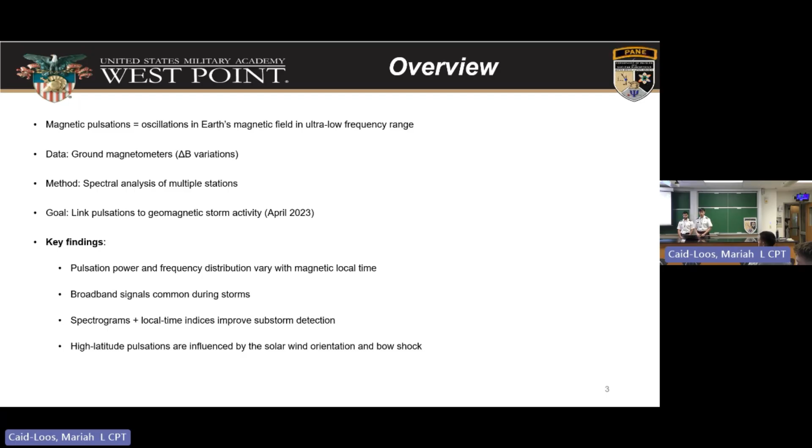So first of all, introduction. What is magnetic pulsation? Like I said earlier, it's the oscillation or shaking of the Earth's field lines in the ultra-low frequency range, and we can see that from the ground. It's very active and complex during a geomagnetic storm, so that's why we're trying to relate the pulsation to what happened in space.

Next slide. So of course, in our profession in the Army, we really care about the so-what. So here's the military relevance of the effects this might have. Here, as you can see, highlighted in yellow are some of the indirect effects on military applications. We can see a lot of these effects are degraded range and accuracy for a lot of our systems. So of course we have to keep that in mind when we fly, and do it accordingly, knowing if there's a certain storm we have to keep this in mind.

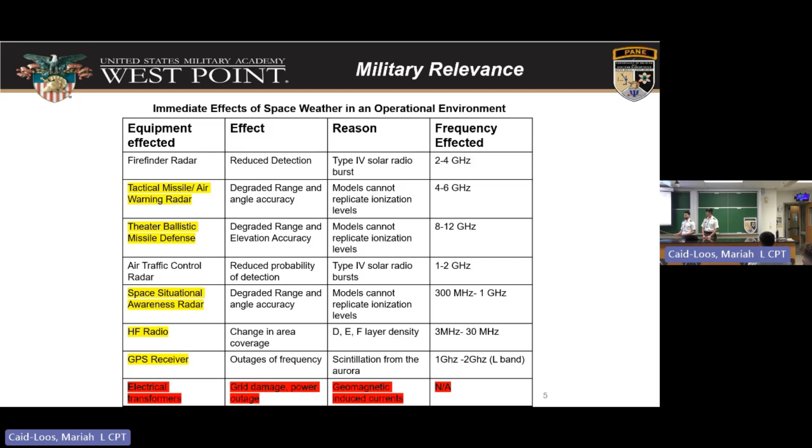And here in red, this is probably the most important thing, the direct effects. For electrical transformers, it causes grid damage and power outages due to geomagnetic induced currents. We can see a case study in Canada where a storm occurred, and the geomagnetic induced currents actually caused a power outage for 6 million people for 9 hours. This shows the scale it might have, like a nationwide scale. You can see how many people were affected, and for the duration, since it's 9 hours, it's not a short period of time.

So yes, some of the factors, but the pulsation basically tells us what happened in this space and what caused those magnetic pulsations. We have different frequency classifications for pulsation from PC1 to PC5, and PI1, PI2. Those are based on the frequency range.

There are several common causes for each classification. For example, PC3 might be caused by the first interaction between the solar eruption and the Earth, and we usually see that in the PC3 frequency range. Whereas PC1 is a little different—there's wave interaction in the radiation belt.

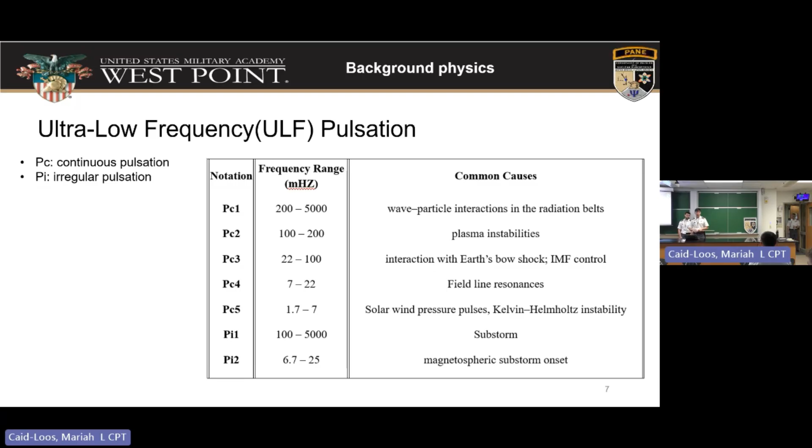So we try to understand what frequency distribution is within that geomagnetic activity, and how the strength of pulsation evolves during the 23-24 April storm.

Moving on to the data and methods. First of all, we use the Wind satellite to tell us how this solar eruption looks—the orientation, the speed, and all that.

Supermag tells us magnetic field perturbation on the ground. So based on that measure, we can link to what happened in space.

Ampere is just an indication for substorm events. A substorm is basically one of the geomagnetic activities that happens at high latitude and on the night side, and usually causes the northern lights. So if you heard about substorm, you can think about northern lights. This is connected.

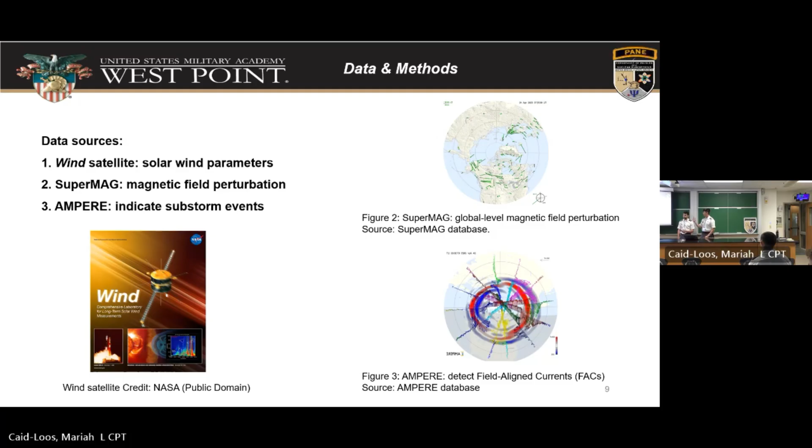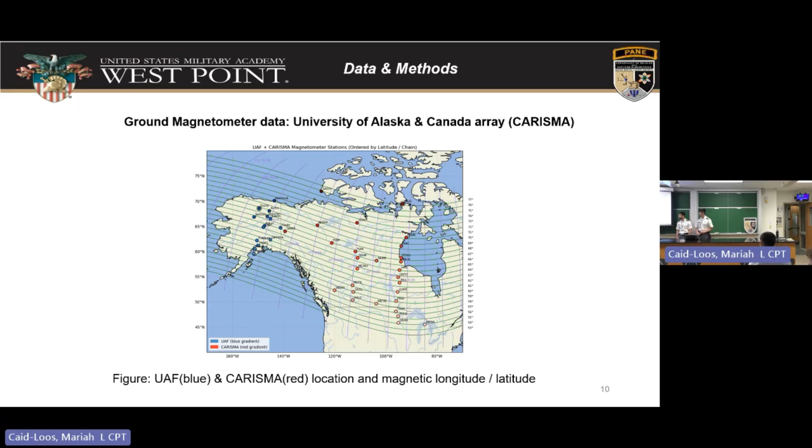This is the ground magnetometer station in Alaska on the left, and Canada on the right. Those 20-ish stations are where the data that we pull out comes from.

We get the raw magnetic field data on the left-hand side, directly pulled from Canada and Alaska. Then we calculated the magnetic field perturbation, and used a bandpass filter based on the frequency classification of pulsation that we talked about earlier.

Then we produce a spectrogram. It tells us about the 2-day event from 23 to 24—the x-axis is time, and the y-axis tells us the frequency range and the strength of the pulsation. Yellow means strong pulsation, whereas dark blue tells us there's a quiet event, nothing happened.

Then we produce a frequency spectrum. We're interested in what happened during this strong pulsation, so we pull it out and see frequency ranges versus the relative power, trying to see where PC3 or another range has a strong response.

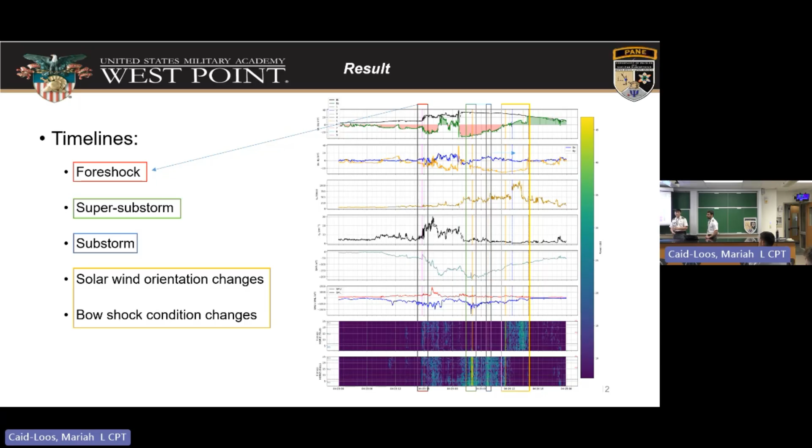So this is our timeline—what happened on 23 to 24 April. There are four important events happening. The first is the foreshock, the second is the super substorm, then the substorm, and the last is the solar wind orientation and some bow shock changes.

So the first event is the CME foreshock. It's basically the first wave of the solar eruption hitting the Earth, causing bubbles, and we can see some little response in the pulsation. If we pull out the frequency spectrum, we saw that PC3 has the strongest response to it.

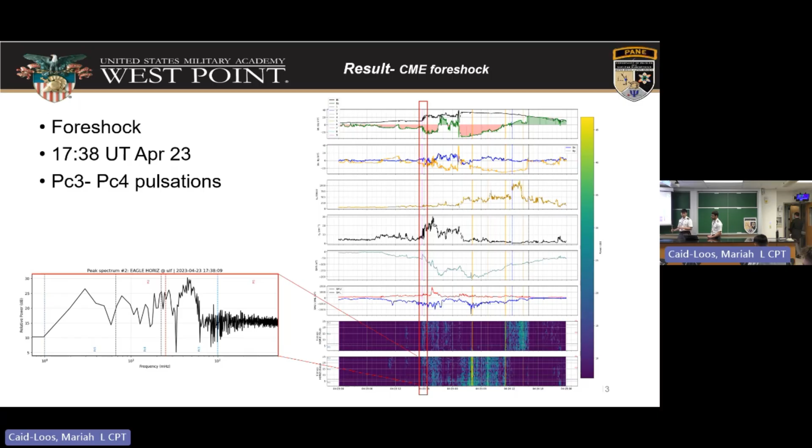Just orienting you to these plots: the first two are the solar wind orientation—the solar wind has different orientations hitting the Earth. This one is the Alfven speed, basically how the wave traveled along the magnetic field line. And then the particle number density.

And next, we move on to the minute pulsation. Basically, PC4, PC5 have a strong response to it, but it's really hard to just look at the spectra and tell there's a substorm. So we need local time index plus the spectrogram.

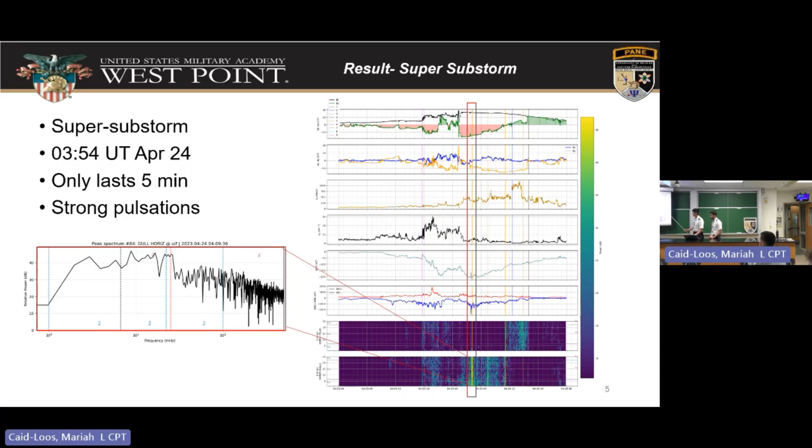What it does tell us is that the substorm can lead to a strong minute pulsation during the mid-latitude to high-latitude stations. And for commander, that means communication disruption and reduced GPS accuracy, and also radar system error. So this is just another case of a substorm.

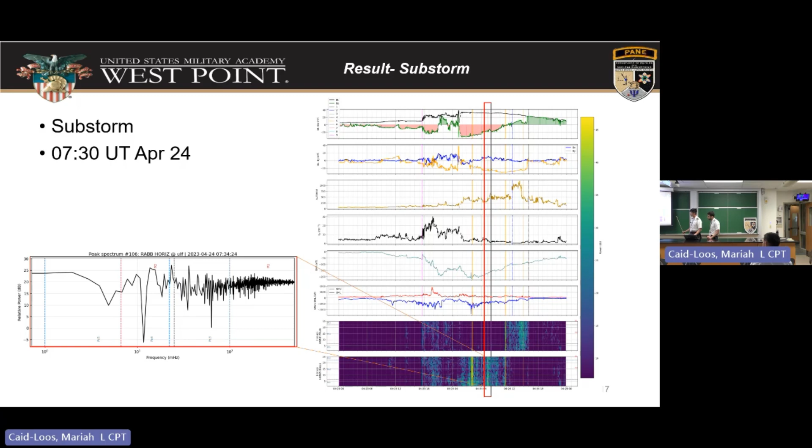Next. So this is what we call a broadband signature, whereas all the frequency range has the same power. And really, it's very hard to just use this frequency spectra to identify the substorm onset.

Next one is a solar wind condition. Basically, solar wind orientation has an impact on pulsation in stations in polar regions. So the one takeaway is that the solar wind can have impact in polar regions, and we need to be careful of that.

So this is the sub-Alfvenic conditions. This is where the bow shock can kind of disappear, and then you also have a strong positive.

About 30 seconds to a minute left. So this is the end of the storm, and then this.

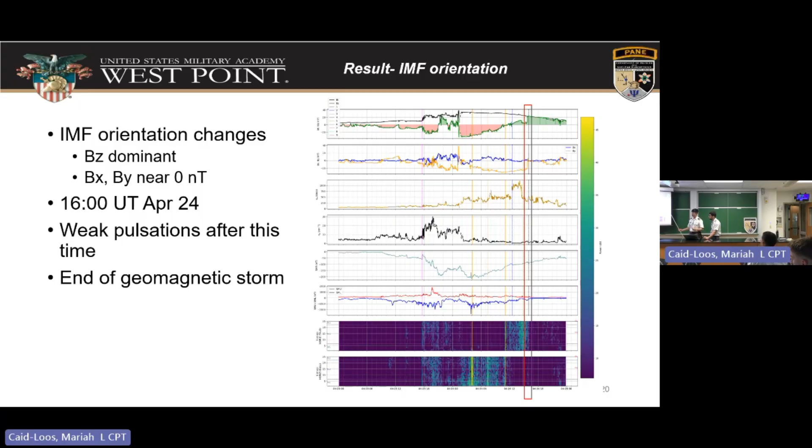So one takeaway from it: the assets in the high latitude regions are vulnerable to solar wind conditions during geomagnetic storms, and then the local electric systems on the power grid in the mid-latitude, high-latitude regions can be disrupted by the substorms.

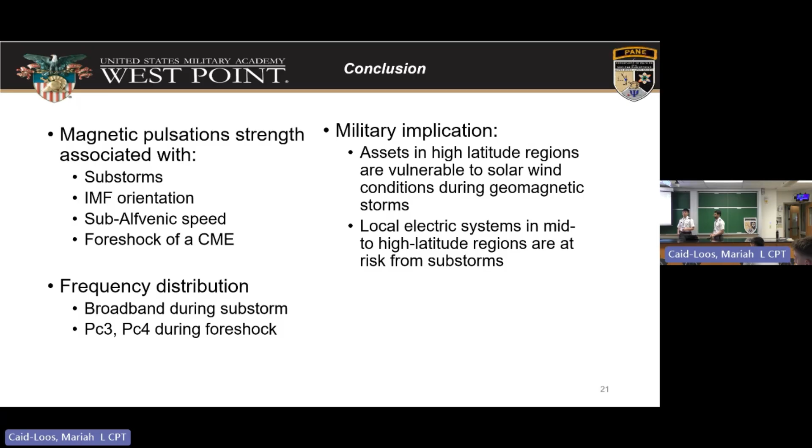And that's a reference, and that's our group. Any more questions? All right.

Can you go back to your slide 15? Maybe go forward a bit to that figure. Can you explain that again? Yes, I think it's that.

So basically, this tells you the red plot. It tells you the strength of the westward electrojets, so basically the westward current system. We usually use that for substorm onset detection because the substorm is coming from the night side of the Earth and hitting the Earth.

So we're trying to see if we can use this to indicate a substorm. So basically, it's a substorm indicator essentially.

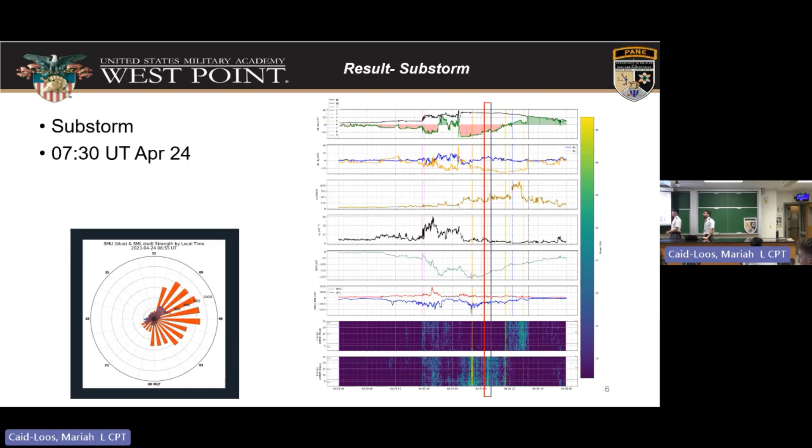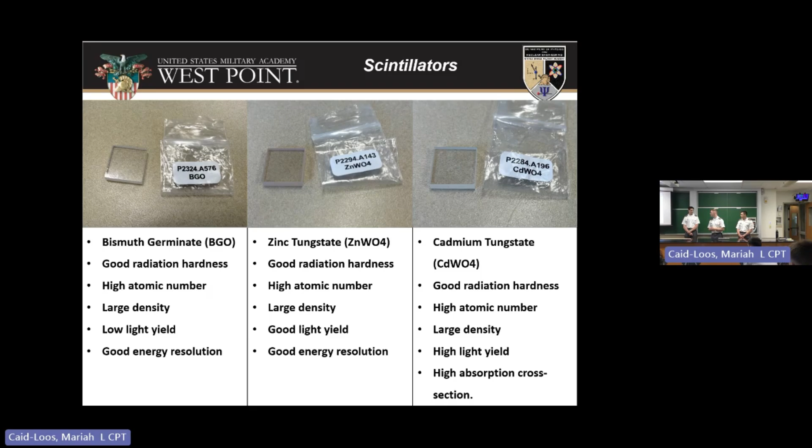We also chose zinc tungstate. It's not quite as good as the germanate for energy resolution, but relative to the industry standard, it's still pretty good. And finally, we chose cadmium tungstate. While it may not be the best gamma detector, as we showed with BGO, it does have a high thermal absorption cross-section, which means it's really good at absorbing thermal neutrons, which is what we want, because that's how we get counts and determine good efficiency of real detections.

So going to our data collection, here is a block diagram of our setup. First we have our button source, which for us was a simple cesium-137 source. From there, we mix that alongside our scintillator material, which was shown in the previous slide, set up next to our PMT, which stands for photomultiplier tube. That absorbs the photons and counts them. From there, that PMT goes to an oscilloscope.

We're able to analyze the pulse and get a reading on every count. That's sent to a digitizer that converts the analog signal into a digital signal that our computer can read. From there, we set that all up in our computer.

Other results: we tested the three scintillators John mentioned earlier with the cesium-137 source, the first of which was BGO. Before we took readings from the source, we first did background counts, measuring atmospheric radiation getting into our center. We had a light-tight box. Despite that, we're still getting another 20 counts of photons per second.

When we inserted our cesium-137 source into the setup, you can see we have a much higher incidence of photons, around 1400 counts per second. You can also see on this PSD graph, the data is very visible. We have a high amount of counts around ADC channel 100, and a very large visible tail where our data is.

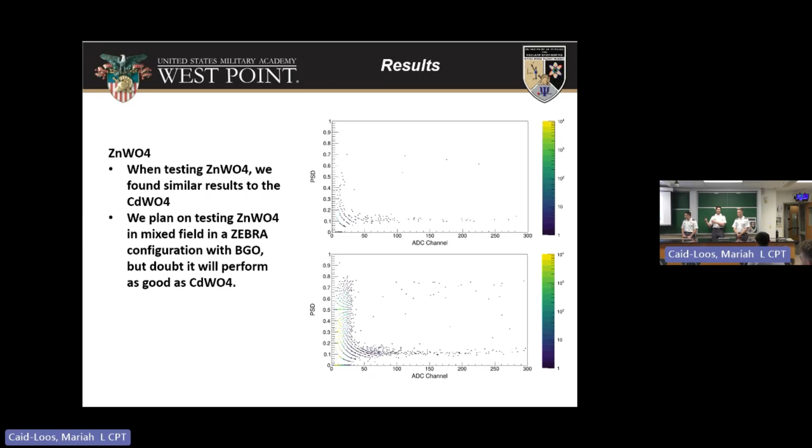It's pertinent to note that a lot of our findings are pretty consistent with the existing state of the art. So that's kind of the point of the work this semester - we established a baseline and got to the point where we can utilize it effectively and get system readings.

On our conclusion, next we'll require scintillators with different PSD signatures for both fast neutrons and gamma radiation sources. So despite zinc tungstate and cadmium tungstate not being as viable for detecting gamma radiation, they might have PSD signatures that are very distinct from BGO when it comes to detecting fast neutrons. So using both - a measured detector with either cadmium tungstate and zinc tungstate with BGO - would be a really viable option. So we have to continue testing each of the sources in the mixed field.

Additionally, we've read some literature that talks about the potential application of thermalizers that are layered in with the scintillator material itself. The idea would be that something like PMMA, a plastic, would create a better opportunity for inelastic scattering to occur and slow down incident radiation and allow for more interaction. Other than that, that wraps up our presentation. Any questions?

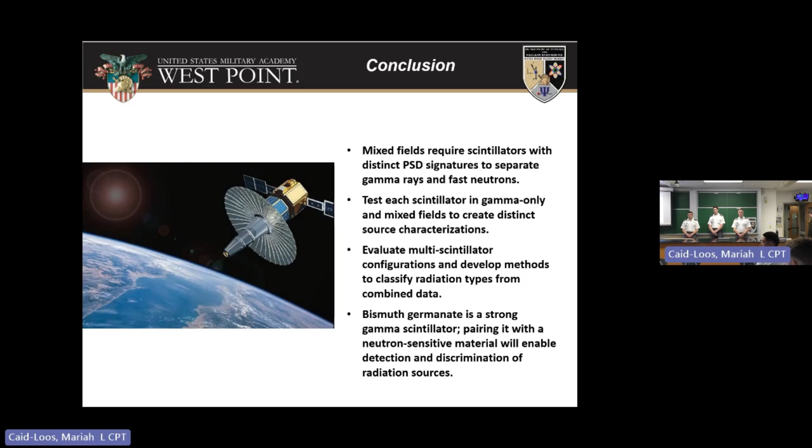Yes, go ahead. Scott Ransom from the University of Virginia. Very nice presentation. So my question is really about - you're trying to optimize the scintillators for fast neutrons. What is the primary source you're expecting to detect fast neutrons from? Is this non-proliferation type work? Is it some kind of astrophysical source? Is it from the sun?

So we want something that's got more of a broad-spanning use. Our next step is to identify pertinent sources we want to start optimizing for. Specifically, we want to focus on incident cosmic radiation that exists ambiently in low Earth orbit. But we also like the idea of artificially induced sources - I think Operation Starfish was a nuclear detonation in space - and we're interested in exploring what those type of effects have on space assets and frankly any asset in general. So that would be something interesting to pursue. Great question - so yes, it's all the above.

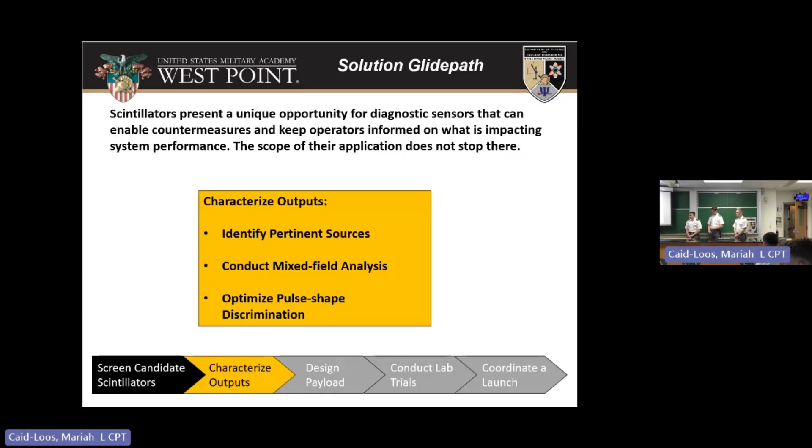And there's one quick question for you all. At the beginning you talked about being able to help with electromagnetic attack, and radiation is just sort of inherent in the environment. Do you hope you'd be able to use this to distinguish between these sources, or does it not know which is which?

Yeah, that's absolutely the goal. The reason we think scintillators offer a unique opportunity for this is because they specifically use pulse shape discrimination. Once we take readings of different potential attack sources or ambient sources and characterize what those signatures look like, we can use our reference pulses to distinguish what we might see in the actual source itself.

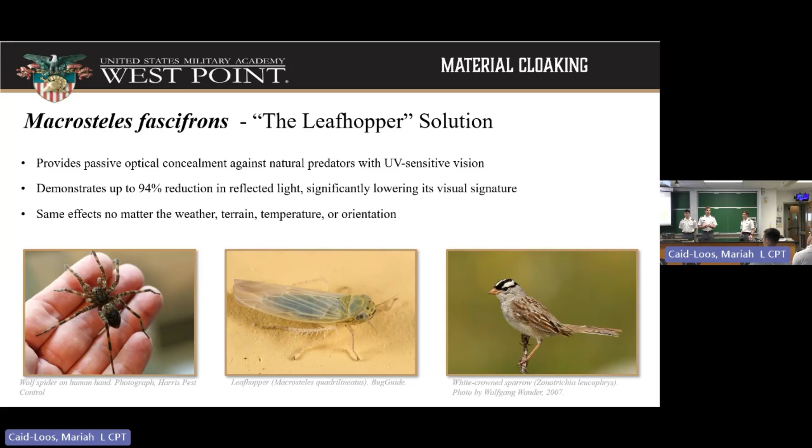Spiders and birds both predate on the ultraviolet light spectrum beyond human vision. Despite this, the leafhopper still remains difficult to detect. It has a passive optical concealment which effectively suppresses reflected light by up to 94%. Importantly, this is both consistent and independent of many factors such as weather, terrain, temperature, and orientation. What gives it this property is not the organism itself, but something much smaller.

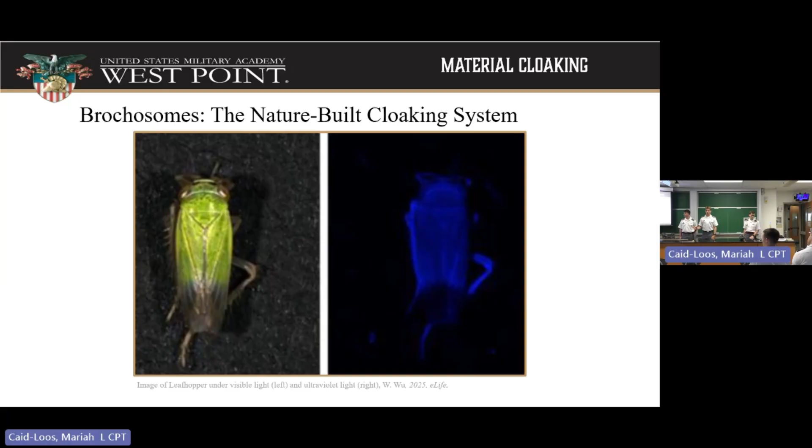The leafhopper produces a microscopic particle called the brochosome. The brochosome is a hollow, nano-sized structure with highly ordered surface architecture that gives it the scattering and suppression effect. As depicted on the left, under visible light, the leafhopper appears normal, but under ultraviolet light, as depicted in the image on the right, the leafhopper appears to have a dramatically reduced visual signature.

This naturally occurring cloaking mechanism is a blueprint for what we can do to engineer materials to reproduce the same control on the electromagnetic expressions of objects.

Now we're going to talk about our research approach. We began this process by understanding our biological field. It was very difficult as a whole to understand what we needed to do and how we were going to do it. By understanding the leafhopper and this particle geometry, we were able to format what we wanted to do moving forward for this project.

The next thing we did was implement the design into SolidWorks CAD software. We designed this particle that you see on the counter there in this software, and we used that as a blueprint for CST simulation and digital testing, as well as 3D printing it so that we can physically test it and validate our results in the future.

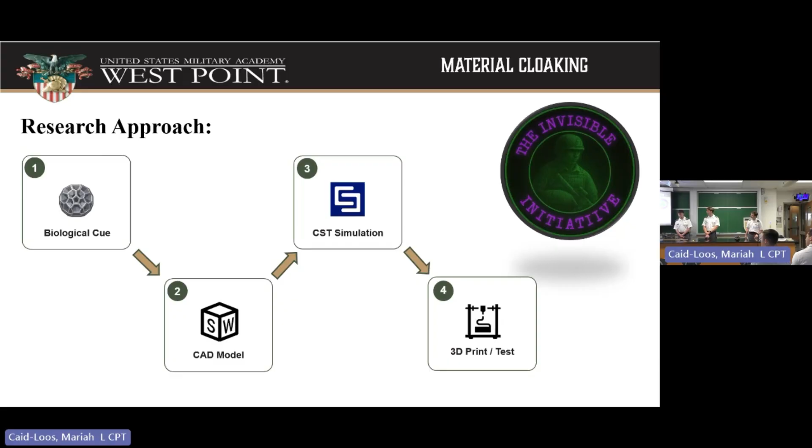The theory that governs our work is simple. On a conventional surface, incident light reflects directly back toward the observer, which allows the object to be seen. The reflection is governed by Fresnel's equation, which determines how much light is reflected based on the angle of incidence and the material properties. Our goal is to control the interaction on the surface level so that the reflected light is no longer returned directly to the viewer, but instead is suppressed or redirected.

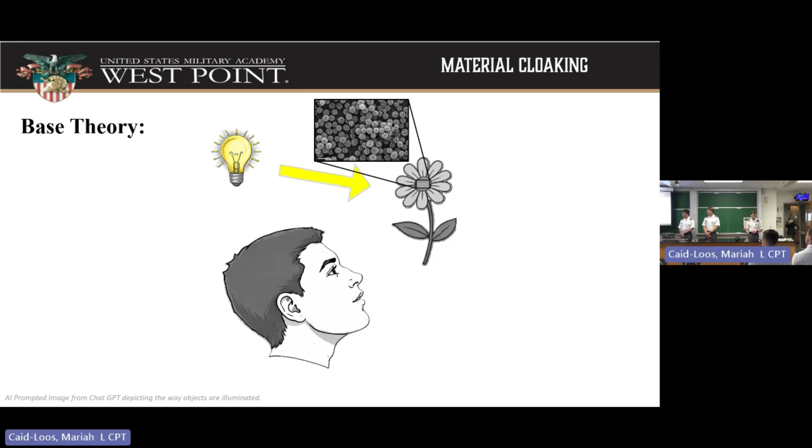In this case, the brochosome surface changes how light interacts with the material. Rather than producing a strong specular reflection, the energy is scattered and redistributed, reducing the return signal. That is the fundamental principle behind the cloaking effect that we are studying.

At the core of this design are two governing principles. The first is Mie scattering. This effect occurs when the wavelength of incident light is on scale with the diameter of the particle that it is interacting with. What this basically does is direct the light away from the direction of incidence.

In addition to Mie scattering, the through holes within the brochosome also play a part in why it's such an effective anti-reflector. When incident light travels through the through holes, it gets coupled and trapped within the hollow sphere inside of the particle. Instead of reflecting the light back, it gets absorbed and scattered in the same direction. Together with Mie scattering, this is what makes the brochosome such an effective anti-reflector.

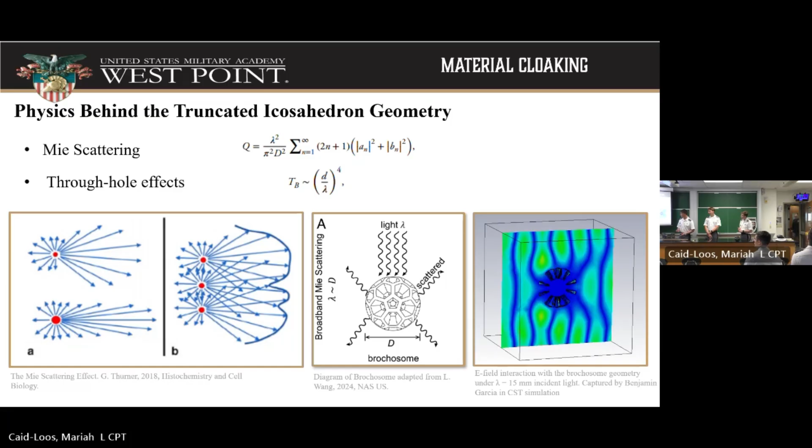Ladies and gentlemen, I introduce to you the truncated icosahedron, better known as the soccer ball shape. Notice the negative cavity, which accounts for two phenomena: the Mie scattering effect and the through hole effect. Notice the symmetry, which eases the mass production of this molecule.

This molecule specifically is made of ABS plastic, which further increases the manufacturability of this product. The brochosome, as seen here, is 3 centimeters in diameter, which correlates to between 3 gigahertz and 10 gigahertz wave.

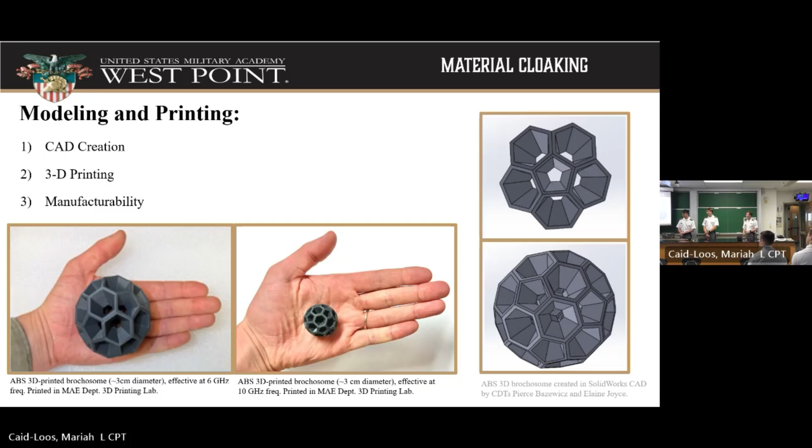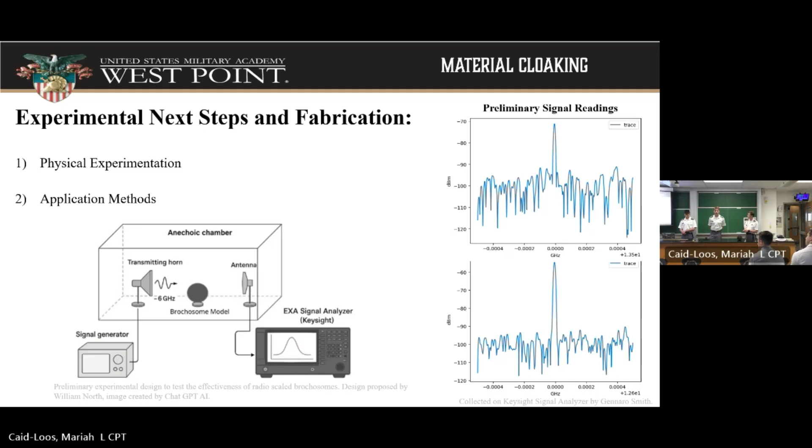Looking forward, the next step will be to prove experimental validation of radio frequency signature control. We're going to be physically testing these brochosomes to ensure that the effect still remains within a real world environment, not just in simulation.

Ladies and gentlemen, this is our future. This is how we regain our advantage on the battlefield. Thank you.

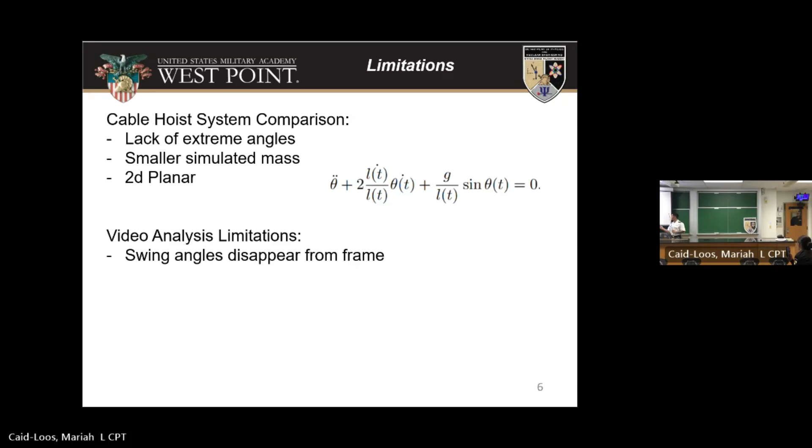which correlates to a lack of data for when the payload is off screen. So one solution, explored by Lieutenant Colonel Capps, was using tracker software, clicking through where the payload was for each frame and doing calculations. With around 10 videos, each around 3 minutes long, recorded at 60 frames per second, that's around 110,000 clicks. So I want to say thank you, Lieutenant Colonel Capps, for going through these videos.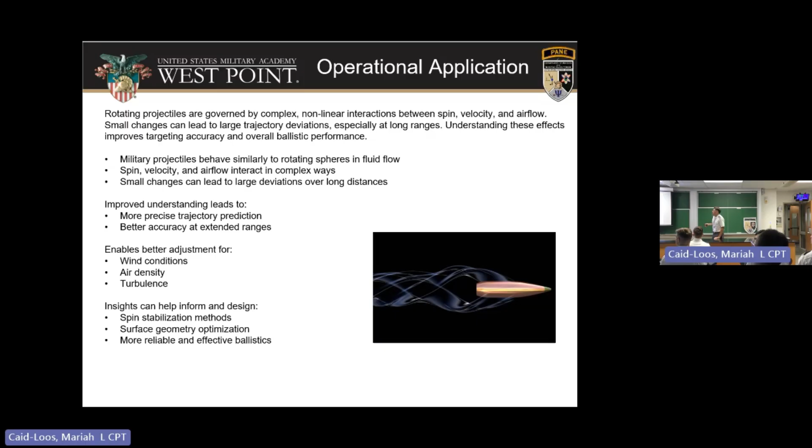You actually measure what the spin rate? So all of this data was gathered at a place called Maven Pitching Labs in Atlanta. This is me in December. There's new technology coming out for sports, and this is through TrackMan, which captures everything about your pitch once it leaves your hand.

There's completely different methods for setting how we get there. A lot of these metrics don't even account for what angle my body is at, how much force I'm putting into the ground, how far I'm getting. It doesn't account for any of that, but TrackMan gathers all this information. And the unique part about this is it's all actual pitches in it.

How was the research going to affect your training here? Yeah, so I used to think that I had to worry a lot about my mechanics, but being a sidearm pitcher, 88 miles an hour is pretty good. So I always thought I had to change when is my arm getting behind my head, when am I maximizing scap retraction, all these kind of different things. Whereas when it comes to the pitch, I'm effective at 23 inches and at 87 to 88 miles an hour.

I now know that what I have to focus most on is the axis tilt. That has all to do with my hand and consistency. I think it helps me and my fellow teammates. We're better able to understand ourselves as pitchers and apply physics to performance.

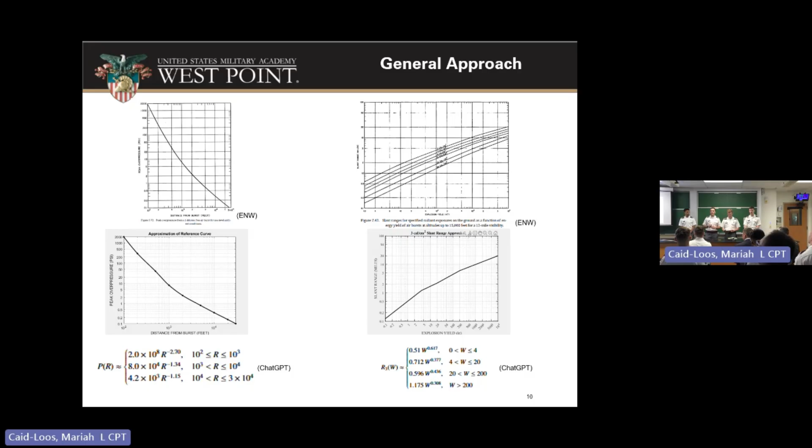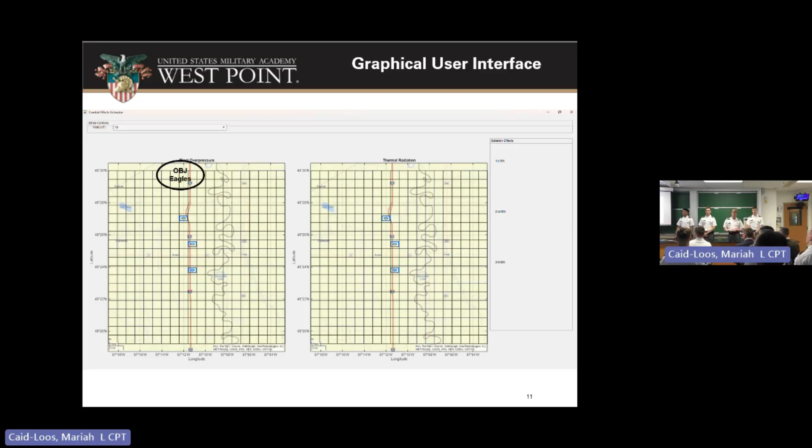Now we've assessed that a nuclear weapon is going to be detonated along the main intersection of I-29. Looking at the blast effects, our innermost ring, the red, is 200 PSI, and our purple ring, the outer, is 1 PSI. Our thermal fluence, on the right, ranges from 3 calories per centimeter squared on the outside, the yellow ring, to 50 calories per centimeter squared on the inside, the red ring.

Now, looking at our battalion effects, our first battalion, the furthest north, has sustained 1.94 PSI of overpressure and 5 calories per centimeter squared thermal fluence, and we're assessing them at 98% combat effectiveness. We're saying they have full mobility and minor external damage.

Our second battalion, south of first battalion, has sustained 29.87 pounds per square inch of overpressure and 50 calories per centimeter squared of thermal fluence. We're saying they're at 30% combat effectiveness, with external systems destroyed, vehicles immobilized, and severe damage.

Now our third battalion has sustained 7.84 pounds per square inch of overpressure and 25 calories per centimeter squared of thermal fluence. We're saying they're at 90% combat effectiveness with moderate external damage and near full mobility. Now, using our tool, our commander can account for the effects of nuclear weapons.

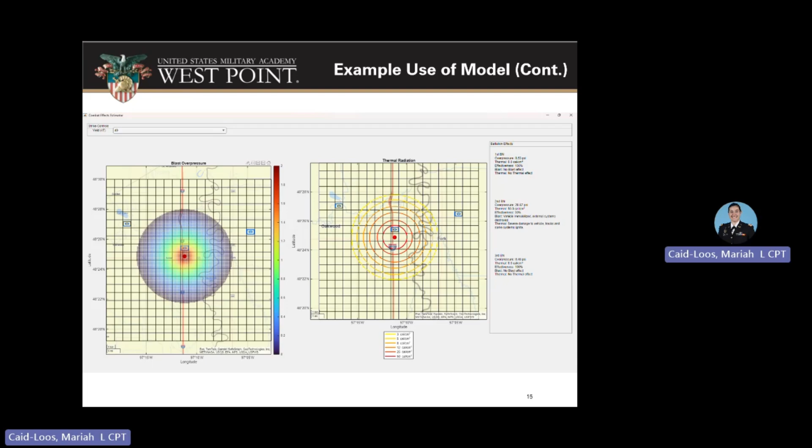So looking forward, there are essentially three areas we can improve upon to make it more useful for commanders and more accurate. First, we're going to increase the mission complexity. This includes accounting for multiple or staggered nuclear detonations on the battlefield, as well as different unit dispersions and types within the AO. Second, we're going to need to increase the complexity of radiation effects.

Finding the effects of radiation is going to include accounting for prompt gamma and neutron doses on soldiers. We'll also need to expand the model to include radiation sickness models, cumulative dose tracking for units, and fallout dispersion models, which become important as units continue to fight on the nuclear battlefield. And then finally, we're going to increase the environmental complexity. Specifically for fallout, we'll need to include wind speed and direction, as well as geographical and 3D terrain effects.

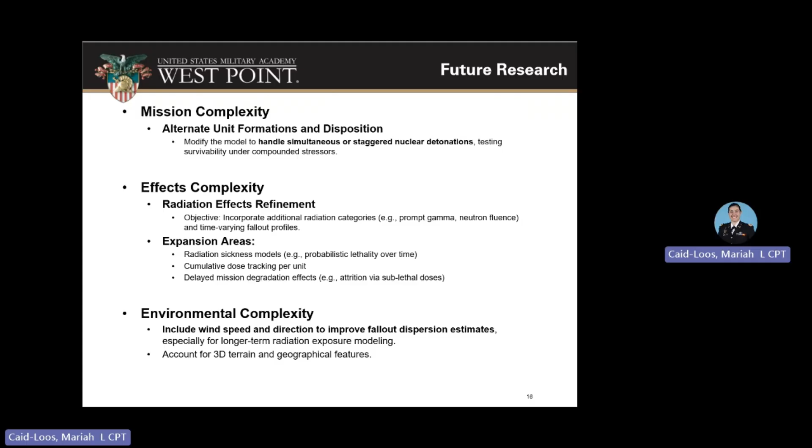So to conclude, we've created a tool that turns complex technical information into simple, actionable results for commanders. It enables commanders to rapidly make decisions about planning, whereas otherwise they would have had to guess or make educated assumptions that might take time. Our tool demonstrates the feasibility of integrating nuclear effects into tactical decision tools that require zero to little expertise to use.

And then finally, we've identified some gaps. Any questions?

To estimate the yield of nuclear weapons: currently this is a planning tool. What they would have is some sort of intelligence saying this is the nuclear weapon that could be in play in the scenario. So then they're going to use that in the planning tool to assess how far they need to space out their battalions. Thank you. Yes, sir.

How long does it take to run one simulation, one scenario? One simulation: you input three clicks, which are the locations of the nuclear battalions, and then the strike and the yield. And then it takes approximately 5 seconds to do the entire computation.

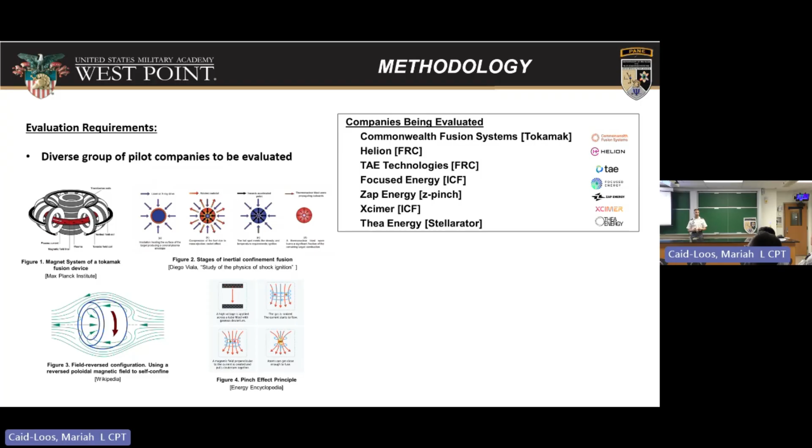Methodology: the first step was to get a diverse group of pilot companies to be evaluated, representing the broad scope of different fusion approaches and companies involved in nuclear fusion. These were the companies selected.

The next step was to standardize evaluation criteria. There's a broad variety of fusion approaches and companies. Standardizing was a challenge, the most helpful criteria was determined to be the Lawson criteria, the product of plasma density, ion temperature, and confinement time.

Facilities were also evaluated based on NASA's technology readiness levels, which are used to evaluate emerging technologies based on maturity and readiness to be deployed in an operational environment.

The next step was research and assessment. Companies were evaluated based on their Lawson criteria and put on this graph, compared to others in the community, and to the National Ignition Facility, which has achieved above break-even fusion energy output.

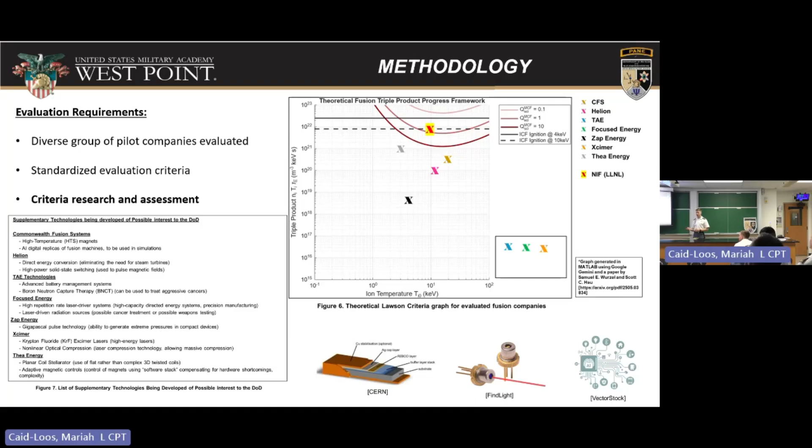Also important was evaluating supplementary technologies being developed by these companies. Almost all of them have been forced to develop technology on their own to meet the extreme requirements of achieving nuclear fusion. Those technologies provide their own benefit to the DoD outside of nuclear fusion, things like high temperature superconducting magnets, laser technology development, and even novel use of AI, among many others. Evaluating these supplementary technologies on top of fusion energy likelihood provides additional benefits to the DoD, even if a company may not achieve nuclear fusion.

Then determining potential defense applications of the fusion energy technology as well as the supplementary technology being developed. Things like ZAP Energy's Z-pinch technology used in modular nuclear reactors, avoiding many pitfalls seen with fission nuclear reactors, such as intense irradiation once those reactors are turned on, and battlefield proliferation and irradiation concerns.

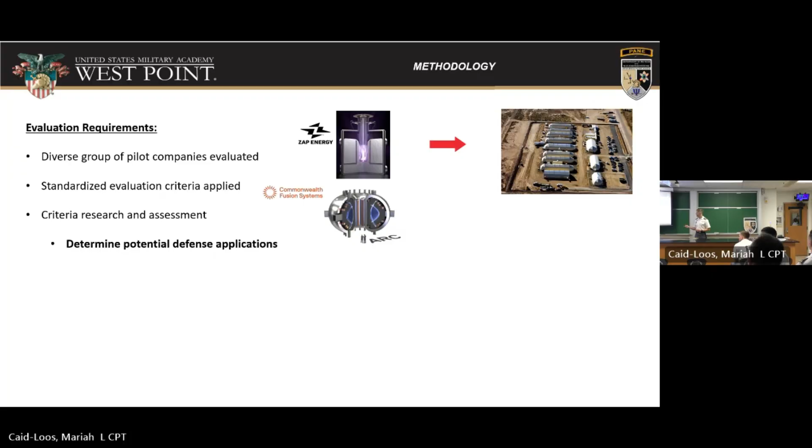ARC, like Commonwealth Fusion Systems, is a possible replacement for nuclear reactors aboard aircraft carriers and nuclear submarines, providing less need for highly enriched fuel and possibly the ability to harvest hydrogen isotopes.

Laser technology has many defense applications, such as directed energy weapon systems, as well as detection and radar systems, like high temperature superconductors used for EMALS, electromagnetic launch systems, for things such as fighter jets, and many other defense applications.

The final step was to take all of these factors and use them to evaluate fusion companies on a standardized scorecard, bringing together the criteria and displaying them in an easy to digest format that the DoD can use to evaluate these companies.

It's worth noting this is a very infantile scorecard. In future research we'll focus on breaking down these specific criteria more and more in order to develop a more useful, applicable, and solid scorecard. This is the direction this research is heading.

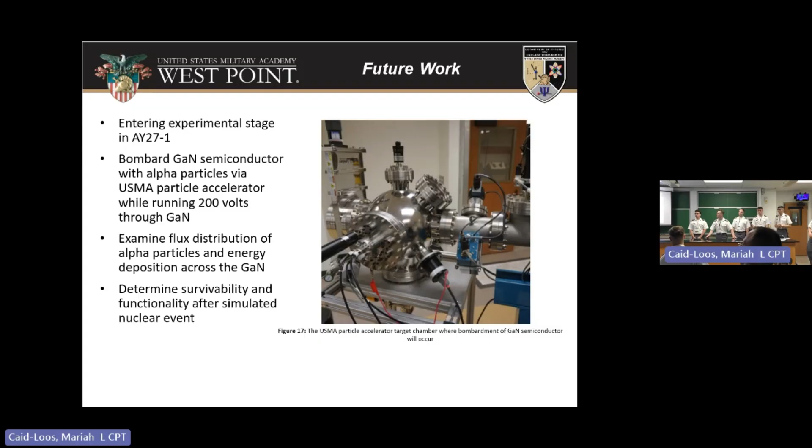You might not like it, but I'm going to ask it. So we focus on gallium nitride as the material. Gallium nitride, being a wide bandgap semiconductor, is generally not used for digital logic - it's kind of not a thing. So things like single event upsets are kind of irrelevant unless you're doing digital logic. And you also referenced the Minuteman missile system guidance, which I assume was designed in the 1970s, before gallium nitride was a thing. So why look at gallium nitride? Why is that what we chose?

I was going to say, regarding nuclear weapons, America does not make any new nuclear weapons due to treaties. But that does not necessarily mean we shouldn't consider what our enemies are upgrading.

To the gallium nitride point, sir, it's been shown to be more resistant generally towards radiation out of the available types. Our point is to try to fill some of that gap with information on the enhancement MOSFETs, but it isn't really shown right now. So what we want to determine is, can we use this as a baseline to inform on potentially more beneficial or other types of semiconductors and their resistances. What we're going to do with this is essentially validate that the models can work for this type of semiconductor, and then see if we can increase that application to help with component selection and other things.

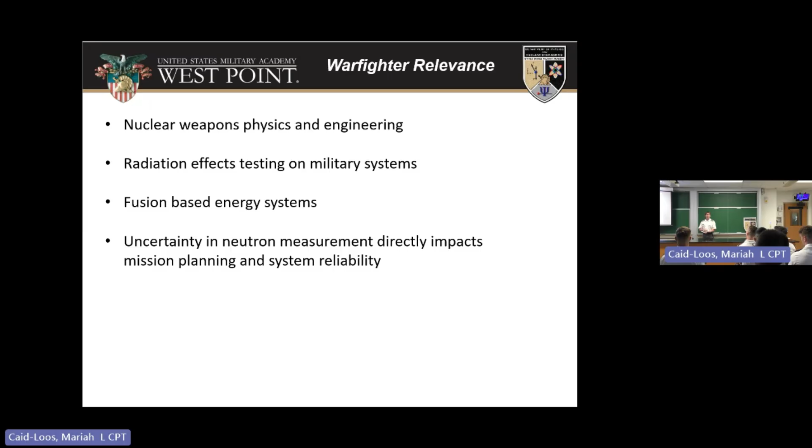So the problem: fusion environments can produce 14.1 MeV neutrons using the DT fusion reaction, deuterium and tritium being smashed together, whether it's deuterium into a tritium target, or at the Omega facility at the University of Rochester, where a DT pellet is shot by lasers creating the DT reaction. This produces 14.1 MeV neutrons. However, these extremely fast neutrons are extremely difficult to measure.

There's real-time detection systems that detect directly. These are active detectors, and they require power, calibration, and live monitoring.

Instead, what's often used, and what they use at Sandia, is passive dosimetry systems. These allow us to get neutron flux over time and analyze it after the experiment happens. So if you think there's a high energy neutron environment, you're not going to have people in there, and it's harder to have equipment in there.

But there's 14.1 MeV neutrons coming, so instead you use passive dosimetry where you place an element inside this environment. Based on its transmutation to a different isotope, you can read the radiation, and depending on how much radiation and counts you get, you're able to say how much neutron flux there was. Right now, the current dosimetry standard is niobium-93 activation.

There's an N2N reaction that occurs, turning it into niobium-92, which is a metastable isotope. This metastable isotope emits gamma rays, and those gamma rays are then measured, telling us the neutron flux in that environment.

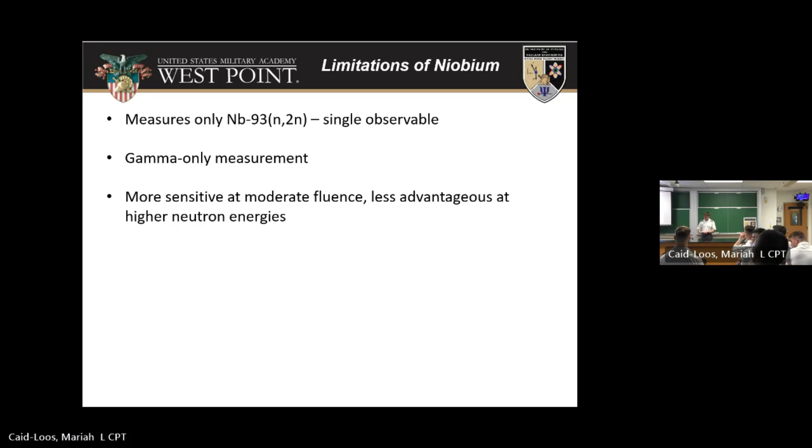Yttrium-89: there are three reactions we're looking at. The N2N reaction is a gamma emitter, so we're less focused on that since we already have gamma emissions from the niobium reaction. Then there's the NP reaction and the N-alpha reaction, both of which turn into beta emitters.

This allows us to measure both gammas from our niobium and beta counts from yttrium. This gives us multiple observables — using the gamma counts from niobium in tandem with the beta counts from yttrium allows yttrium to potentially be used as a complement to niobium.

It's also important to know beta counting is not inherently less uncertain than gamma counting, but using them together may allow us to lower that uncertainty.

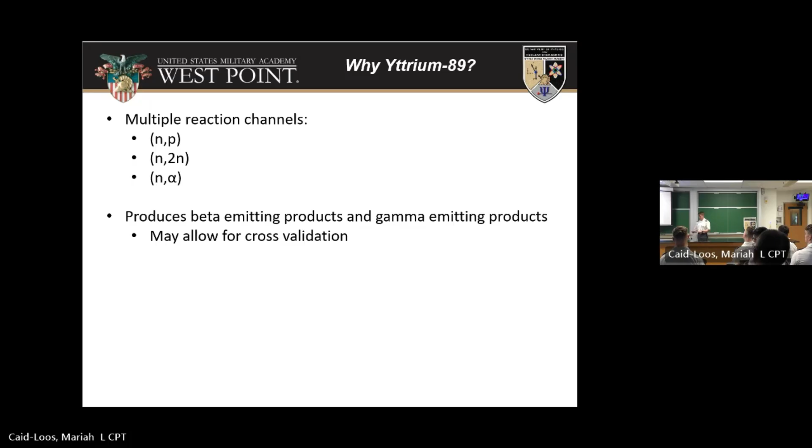Yttrium and niobium are both used, which allows us to directly compare our results. Nickel and sulfur are also included on the packs because of backscattering — nickel and sulfur react more to moderate and lower energy neutrons, and including them in the pack allows us to measure that as well.

It was irradiated at the Omega facility at the University of Rochester, which produces 14.1 MeV neutrons. Post-irradiation counting via gamma spectroscopy is done using HPGE detectors.

The beta counting is done using a scintillation detector or proportional counter. This enables taking the results from the HPGE detector and the results from our scintillation detectors, so we're able to compare beta counts and gamma counts.

I started this project at Sandia. I showed up to Sandia National Laboratories wanting to pick up research, and they came to me with this project — this one measurement.

They had previously put yttrium-89 into one high energy neutron facility before I picked up the project, and it showed that there was activation. They offered for me to lead and take over this project because they didn't have the effort and resources to pursue it at Sandia at the time, so I took it over.

Since then, we've put yttrium in two more high energy neutron facilities, and while at Sandia, I constructed the foils that were used on the first trip.

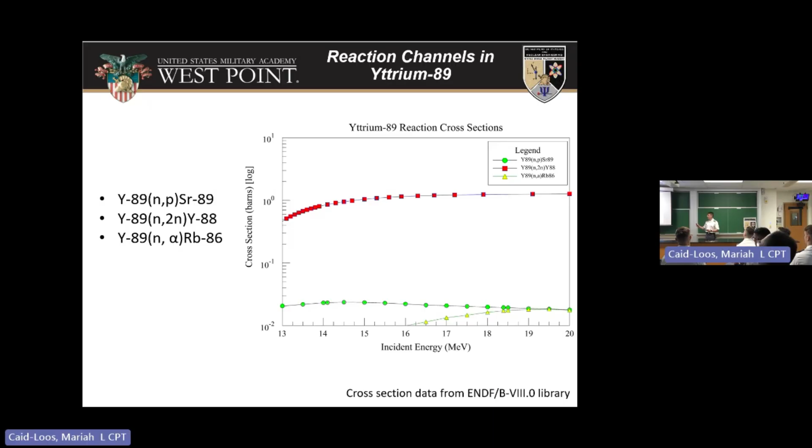This makes the timing critical. That's one of the things we're looking into, like when's the best time to actually start counting, and that's one of the processes we came up with.

Omega results: there's been 2 campaigns at Omega led by me. We went once in 2025 where our counts were too low and it was inconclusive, which was already off to a bad start, so we had to change the pack design.

That allows us to compare our counts here at West Point to the counts at Sandia, which also helps us validate the counts being done.

Now over spring break, more packs were put at Omega in April, and the goal of this is to get the statistically significant counts that we want, allowing us to get enough counts so we can compare our data for that analysis.

The expected outcome and conclusion: niobium still currently remains a strong standard for passive neutron dosimetry.

However, if yttrium is successful, depending on the counts we get back from this April 2026 trip, the multiple reaction channels it offers, with the ability to cross-check the measurements using the beta and the gammas, will hopefully allow it to be used complementarily with niobium to better lower the uncertainty of the neutron flux in these high neutron energy facilities.

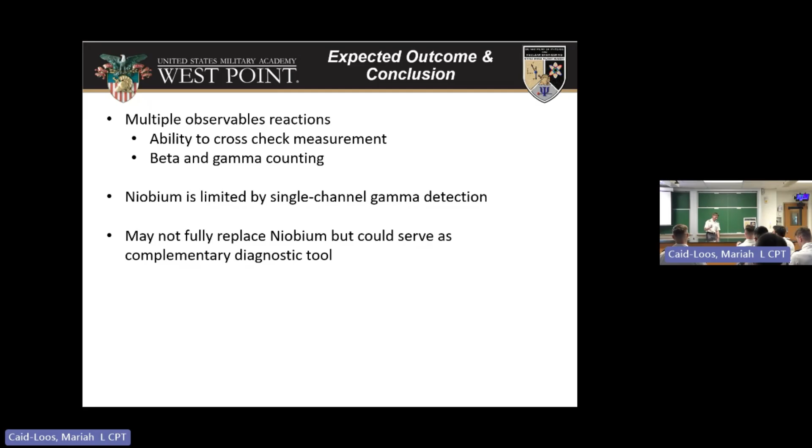Colonel Reinhardt, on your session chair for the third and final session today. We're going to hear from Team ARES, specifically about this year's project DEIMOS.

Thank you, ma'am. Good afternoon, everyone. I'm Cadet Matthew Pavia, and on behalf of our team lead, Cadet Nathan Chang, the team and I will be briefing you all over Project DEIMOS. So today we'll tell you a little about ARES and the problem that we seek to find a solution to, and then we'll dive deep into that solution, how we solve it with our launch vehicle, avionics, recovery team, and our airbrakes.

So the mission of ARES is to educate, train, and inspire cadets in space exploration, as well as finding new ways and developing them so that they can find new ways to expand on new technologies. The vision of ARES is to build a community dedicated to learning, dedicated to leading, dedicated to the process of expanding on what we once thought was possible.

We first build this community by inspiring those that will come after us, because it is our job as future leaders to leave something behind for others to pick up and run. So ARES is the nexus of this community because our influence goes on far beyond West Point. We work with middle school, high school, and university students throughout the year. We'll host launches where we teach them how to safely and efficiently conduct rocket launches, and this gives us an opportunity to spread our knowledge and love for rocketry.

ARES does not define itself by the competition we compete in, the research that we do, nor the rocket that we built. We define ourselves by the impact that we have on the cadets, the Academy, West Point, and beyond.

And finally, Ares is building the future of Army space operations through our research and the leadership that we bring to the table. The problem that Ares seeks to solve is what we're currently seeing in Ukraine, a very large problem with drones and UAS systems. Currently, the systems that the Army has as solutions to the drone problem are very costly and expensive. Ares seeks to find an inexpensive, easily deployable, and man-portable system that can solve that problem.

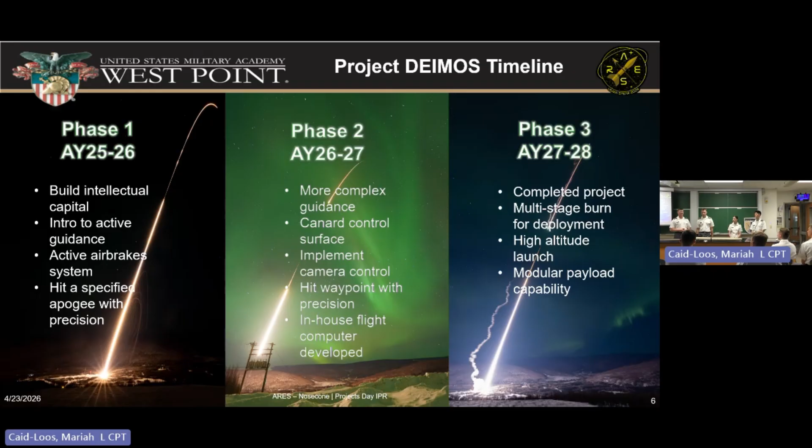This is a multi-year project. This year, the goal was to just master the fundamentals. Can we make a rocket that has deployable airbrakes that can allow us to then build up in future years to take out an enemy drone? Next year, we'll focus on a more complex guidance system using more sensors and cameras to find and detect drones, as well as finding and using more control surfaces such as canards. Then in future years, we'll focus on high altitude launches and developing more of our capabilities.

And I pass off to Cadet Roinn Stout.

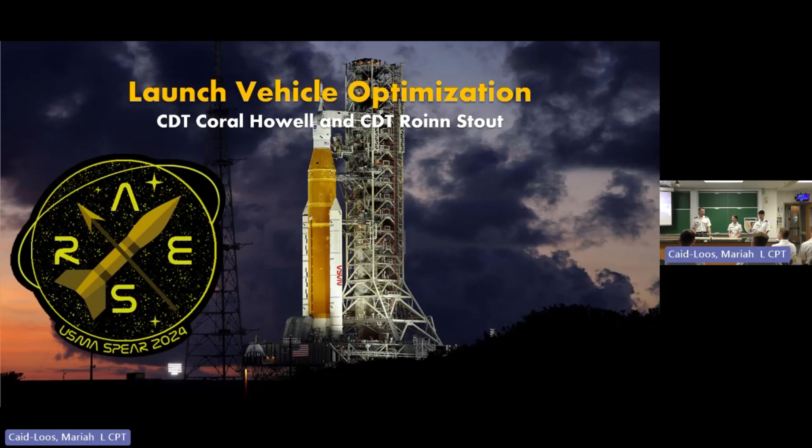Good afternoon, ladies and gentlemen. My name is Cadet Roinn Stout. I'm the launch vehicle team lead, and I'm here with my team, Cadet Coral Howell and Cadet Nathaniel Jang. We're going to be going over our launch vehicle optimization.

For the launch vehicle, our mission statement is for the sub-team to build and optimize a launch vehicle to support Project DEIMOS and all of its scientific efforts. This means implementing each subsystem's technologies into a fully optimized rocket. With research into launch vehicle material, fin shape, fin can design, and with launch simulations, we build the finished optimized rocket that we look to use for leading our mission.

Looking through our design process, we started with our initial design research. This is where we generate and come up with our critical design decisions based on the vision of Project DEIMOS. Here we fit the vision of each sub-team and each system together to create a final working optimized launch vehicle. This is also where we do research with calculations, math, physics, and prove and disprove certain engineering and design decisions.

Finally, using this initial design research, we come up with our finalized design. This is where we apply what we learned from our initial design research and start to make this final launch vehicle. Here we use simulations to finally determine the small details that each portion of the rocket will be. This is where we determine our radius, our length, the weight, and where each subsystem goes on the final launch vehicle.

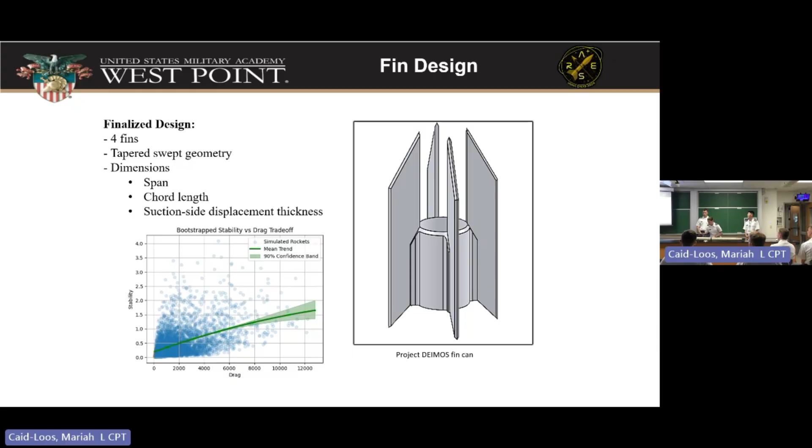Moving on to our fin design, there were a couple of important things about our finalized design, including the number of fins - 4 fins - the tapered swept geometry, and the dimensions of the fin can itself. In the graph comparing stability and drag, the green line is the most optimized trade-off between the two, and all the dots are simulated rocket launches created by a synthetic data set. This was created using the Barrowman stability equations, the drag equation, and an equation for fin flutter, allowing us to create graphs describing this engineering performance ratio.

We also looked into the optimal suction side displacement thickness, chord length, and span, which were equivalent to the shape we decided on. The suction side displacement thickness is the reason we canted the edge of the fin can, to ensure that air moving around the fin can stayed close to the fin itself.

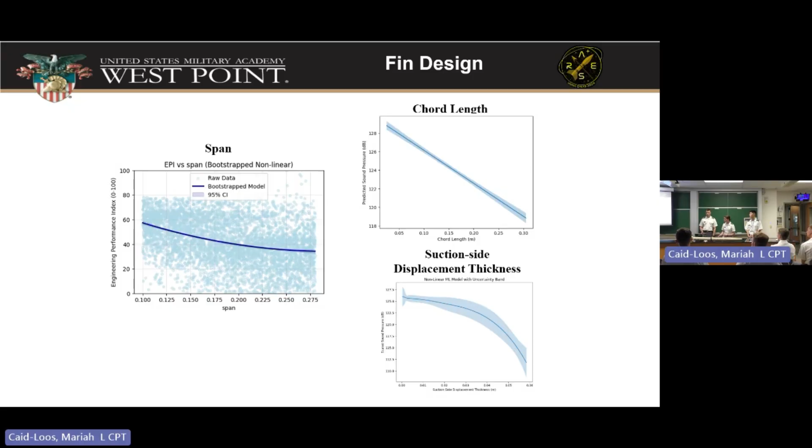We have a Loki J396 motor, an American-made motor with an impulse of 650 Newton seconds, which is pretty high for just a J-class motor. Anyone familiar with model rocketry knows this is a pretty optimal motor, and it allows us to get a good oomph off the launch pad, giving us good impulse to reach higher altitudes than would normally be expected for a J motor.

We also have 2 points of separation, which will be important later for avionics recovery when they discuss their portions - this is basically where the 2 different parachutes will come out during our recovery process. We also have energetics on each end of the avionics bay, which avionics will later explain for the deployment of these parachutes.

Also, in terms of thermal properties, going back to the slide, we talked about—well, I didn't really talk about it—but it has a lower specific heat but a higher thermal conductivity, so it will have more of a uniform distribution of heat, which we don't see as much with materials such as fiberglass.

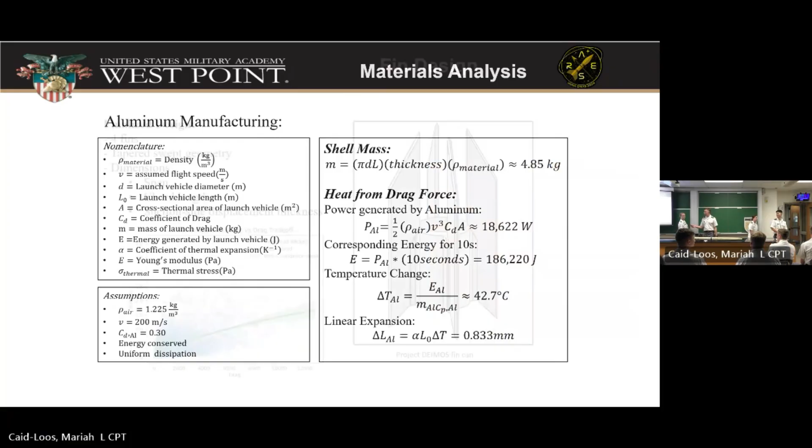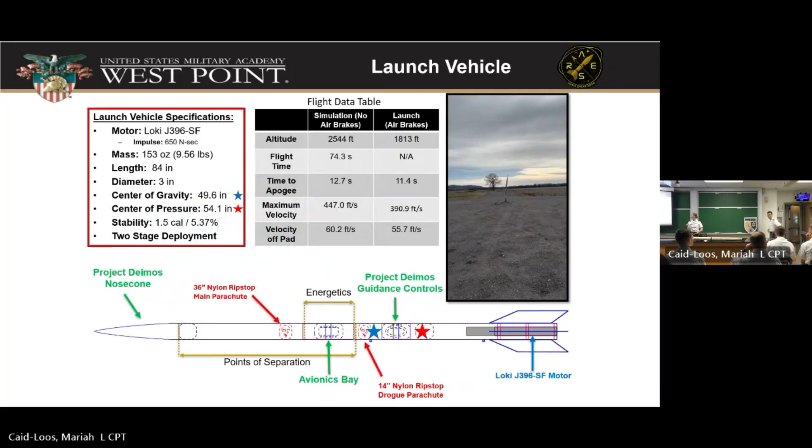Then to continue, I'm Olivia Jones. I'll begin briefing you on Nosecone. The subsystem of the Nosecone is to carry our onboard payload. They can carry camera systems, onboard sensing systems.

The payload team was transformed to Nosecone this semester and this past year. The payload team in the past has built plenty of internal systems that accomplish our mission overall, as this was no different. The payload team transformed to the Nosecone team with the mission of enabling our overall system. And we needed to transform the way we approach problems here to integrate with the overall DEIMOS team and accomplish the complete mission.

The primary things we needed to consider this year were the environment our system will be placed in. We'll be experiencing speeds up to Mach 2 based on our mission set. Because the system moves at such high speeds to enable our active dynamics mission, we need a nose cone that can withstand these conditions, be strong enough, simple enough, lightweight enough, and made of attractive materials and shape, while able to carry our onboard payload.

We fabricated our nose cone to minimize drag at high subsonic and supersonic speeds, the Mach 1.2 to Mach 2 speeds we're anticipating. It needs to be custom built with the capabilities we have here at West Point, and able to carry our onboard payloads. We're strongly limited by the materials we have here, and had to adjust all of the capabilities based on those systems.

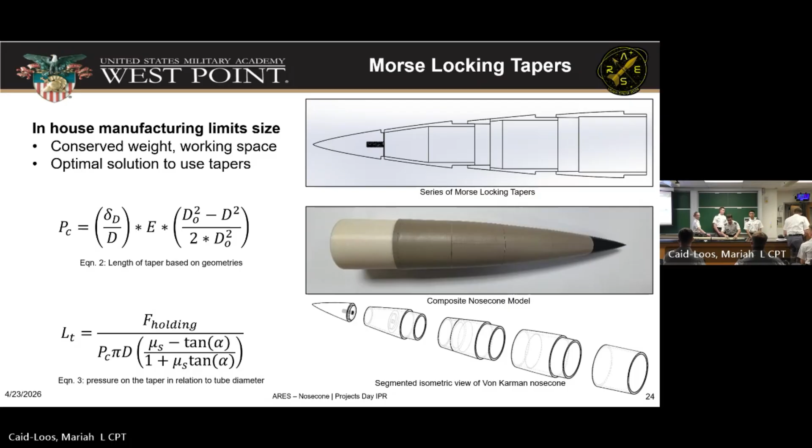Avionics. Hello everyone, I'm Cadet Sanders. Unfortunately Cadet Wong could not be here today, but I will be briefing the avionics and recovery.

Our mission statement, bottom line up front, is that we have to recover our rocket to get the best data possible to analyze how our launches went, what went wrong, what went right. That's our job as avionics and recovery, to make sure the rocket that goes up comes down hopefully in one piece, because a rocket that exploded into a million pieces can't give us the most information to improve.

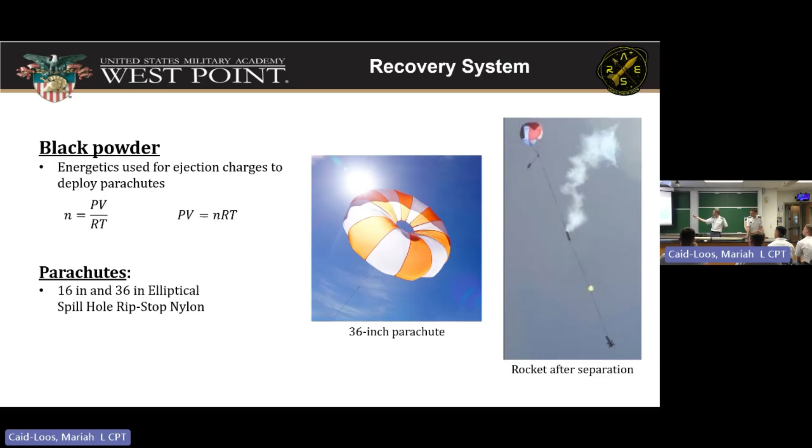Here are our black powder equations, the energetics used for the ejection charges. For our parachutes, we will be using a 16-inch and a 36-inch parachute in order to recover the rocket.

Currently we are using an Altus Metrum TeleMetrum flight computer for now. However, in phase 2 in the future, we will be designing our own flight computer in-house with our own code, in order to get a quicker relay between the rocket's apogee calculation and the computer on the ground.

In short, that was avionics and recovery. Are there any questions?

So when designing an avionics bay, there's really only two methods: 3D printing, or using the same material that you're building with and making it an inner tube of sorts of the same design.

For the prototype, we 3D printed so we could fit the components inside to our liking. Originally we had a pre-manufactured tube that fit within there, holding one of our flight computers, but with our own design 3D printing, we have the redundancy to put both computers in. So designing our own allowed us to have that redundancy, have more space, and really build out something better.

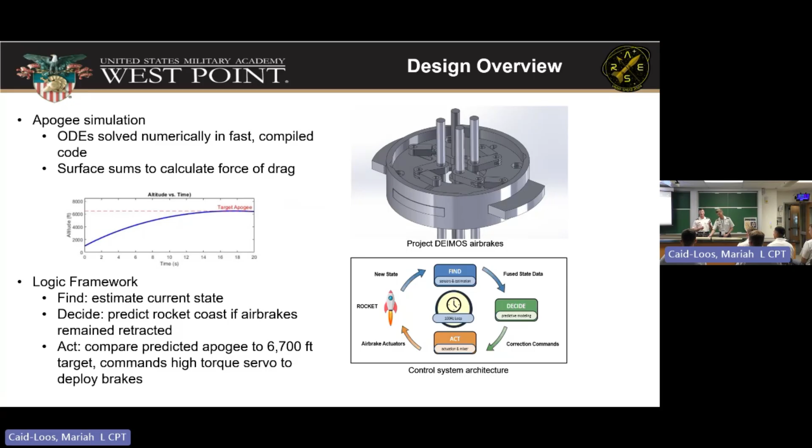I'll pass off to Justin to go over our solution. Ladies and gentlemen, my name is Cadet Justin Zedwall. I dealt mainly and specifically with the simulation software. In order to prove concept, we ran a multitude of simulations that proved design considerations and ultimately led to the product we have on the table.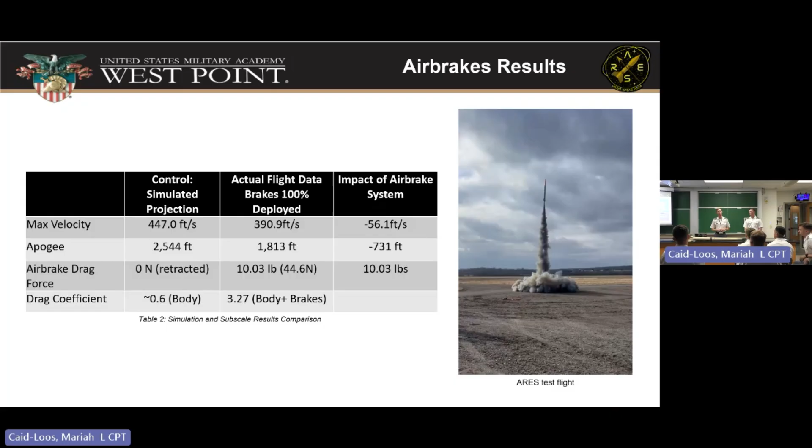To further that question, the launch simulations I used for the launch vehicle were with air brakes retracted, mainly because the software I use does not have air brakes as an option. So we used the simulation data for a launch without air brakes to give us another set of data to compare the air brakes launch to. The reason is because we were going to do 2 launches, one without and one with air brakes, but we ran into a time constraint and could only launch once with air brakes deployed, so we could compare simulated data to the real data.

It's a perfect question.

Did you find out that the rocket was controllable using 1 air brake or 2 air brakes? Were you able to change its course or trajectory through integration with it?

With the data from the subscale launch, we can, not definitively, but we can assume that deploying 1 air brake instead of all 4 would definitely change the direction of the rocket. But controllability is something we need to figure out next year and in years after - how much we need to deploy a single air brake versus 2 or 3 to have control.

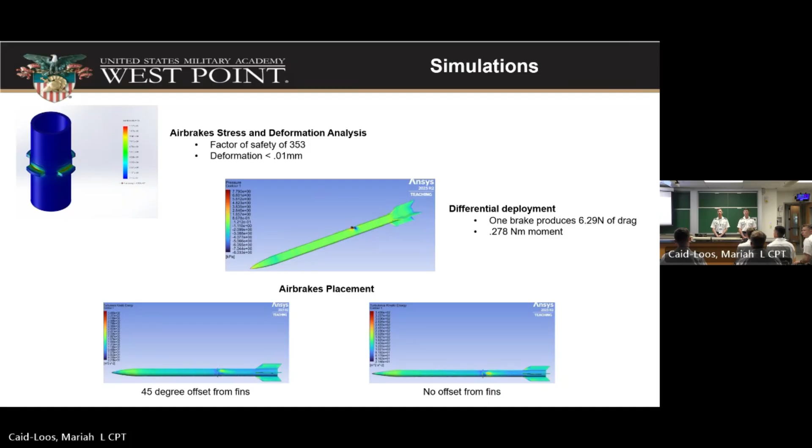What we noticed is there's a big capability gap in our wars. We're seeing a lot of drones being used, especially in Iran, Syria, and Ukraine, and we don't have a good capability at the platoon and squad level to take them out. We've got the DE M-SHORAD, which is a Stryker platform, which is great, but you need to be in one of the upper echelons, like a battalion-sized element, to have access to these. It's not going to work for a squad.

We've got shotguns, which have their benefits, but at the same time they've got range issues and accuracy problems. You have to be able to lead your target, which is difficult. In addition to that, there's multi-projectile rifle rounds, less common but still used. Essentially, you're making a shotgun out of a rifle.

We have the drone busters, which use radio frequency to confuse drones the same way they're getting their input from their controller. The problem now, as we're seeing a lot in Ukraine, is we've got fiber optic drones that get their feed through the cable, so they don't rely on the radio signal and can't be disabled by these drone busters. So primarily we're targeting these group 1 and 2 drones.

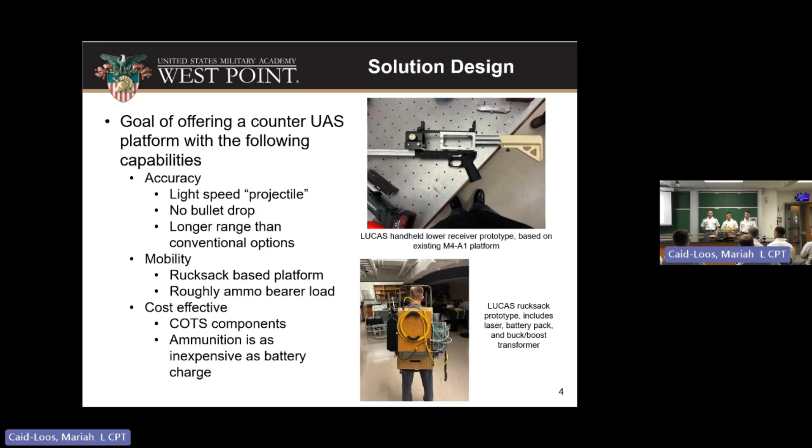So last week we went out to the range to test this for the first time in the outdoors. Our two main goals: number one, we wanted to see how it performed in a realistic setting, not just in the nice lab. Secondly, we wanted to see how well a human could do with this.

So it's a directed energy weapon. You have to hold it on target for a specific amount of time to get through the material you're trying to break through. And how well can a human hold on?

In our operation here, we treat it as a crew served weapon. We have in the prone our weapon handler, who is strictly aiming the weapon and keeping it downrange the entire time. We have the laptop operator, acting as the trigger mechanism, who controls that via the laptop connected to our laser box. Finally, we have our RSO, acting as the safety, like the safety on your M4, who also has the viewer to see the IR beam to ensure it goes on and off correctly.

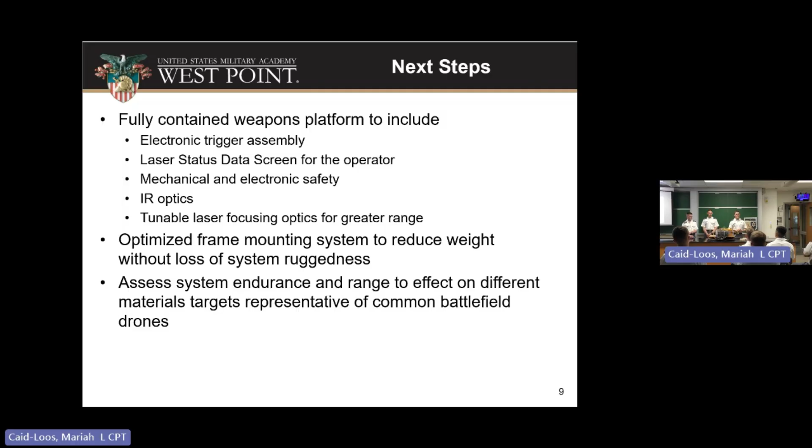We're also going to optimize the rugged frame to decrease weight for use in the field. So our project impact, our goal, is an accurate, lethal, mobile, and cost-effective solution for taking down drones. Our end state is a directed energy weapon that can be used by one person in a dismounted unit to take down class 1 and class 2 drones for a platoon and squad system.

This concludes our brief. Any questions?

Is there any plan to add something like a camera stabilizer to the end of the mounts to keep human error to a minimum? That's one of the things we're looking at. That's probably a next semester project, looking at how to stabilize that beam.

Any ways to increase the accuracy on it, so hopefully you can see where you're actually shooting. Also any other systems that will help improve clarity and stability, we're open to including anything, as long as it doesn't restrict weight too much. You still want to keep it light enough that a person can carry it. We're not trying to knock it out.

Another way you could improve accuracy is to not use a continuous wave. Have you looked at or thought about using much higher power but much shorter duration pulsed lasing? The problem we run into with stronger power is you need a more powerful laser to do so. With that though, increases the size and weight, and also the power needed for it. You need a much bigger cooling system to run that laser. So when we include a lot of those systems, it makes it a lot harder for a person to carry, and it starts to turn from a person carrying it to like a monkey carrying it.

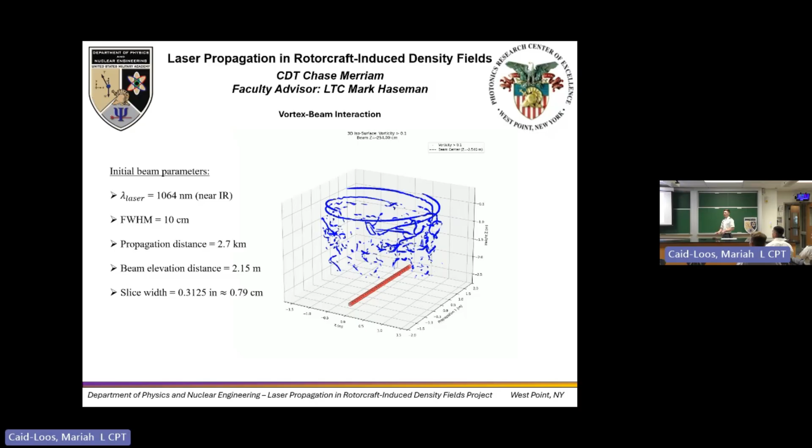Let's see, the same thing here. Just pay attention as we go through the different plots. That is what all these plots are based on: intensity distribution and such. In order to do this computationally, we have to break the field into a bunch of smaller slices as we propagate, which leads me to my next point.

This is an example vortex. It is exaggerated for the purpose of understanding how the beam travels through this vortex and where the beam ends up on the other side.

What happens is when the beam interacts with certain portions of the wake, it's going to refract in certain directions because the density gradient is different from outside the vortex compared to inside the vortex. What's changing is density, which correlates to a change in index of refraction, which is what refracts the beam inside of the vortex itself.

There's a lot of math here, but the key points to understand are: first, converting density to an index of refraction change. You can think of the field as an index of refraction field where we propagate through it and different wavelets incur different phase distortions and phase delays. When they recombine and we propagate on the next slice, what you're seeing is a phase accumulation as we propagate through the entire field.

There are some Fourier transforms that are performed to take it from positional space to transverse frequency and then back to positional space so that we can create an intensity distribution of that data and visualize it.

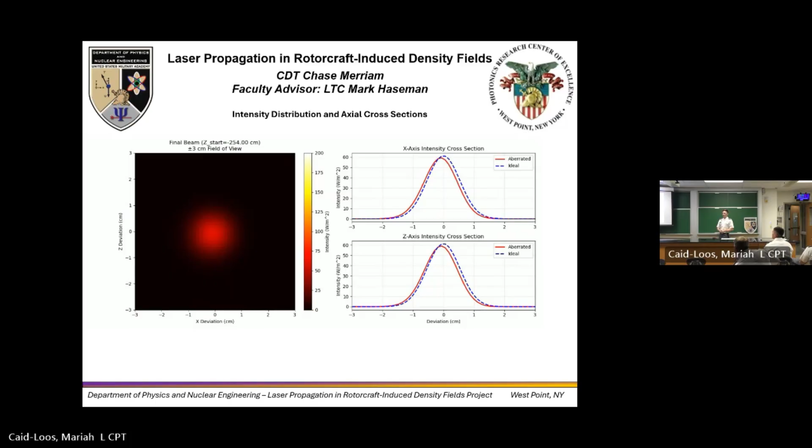Lastly, operational considerations: why does this matter to the Army? The Army has been very invested, very vocal about its interest in incorporating directed energy systems into modern platforms. They've done so with Strykers, Stryker brigade combat teams. So how do we incorporate this into modern aviation and thermal technologies?

Because there's a high risk, as we've seen in the Russia-Ukraine war, where Ukraine and Russia both have used small drones with munitions on them to take down multi-million-dollar platforms. So that is a key component.

There are many considerations when talking about these flow fields. For example, when incorporating tail rotors into the equation, we know that the blades themselves are shorter, they're thicker, and they create stronger vortices, approximately 3 times as strong as a Chinook.

That is very important to understand when the Army is looking at incorporating directed energy systems onto aerial platforms. The path forward for us next semester is to look at time-dependent flow fields, which requires a supercomputer because each individual 3-dimensional plot is tens of gigabytes of data. To do that realistically, we keep it at a certain elevation as if mounted on the aircraft, and we need time-dependent flow fields to more accurately model the situation.

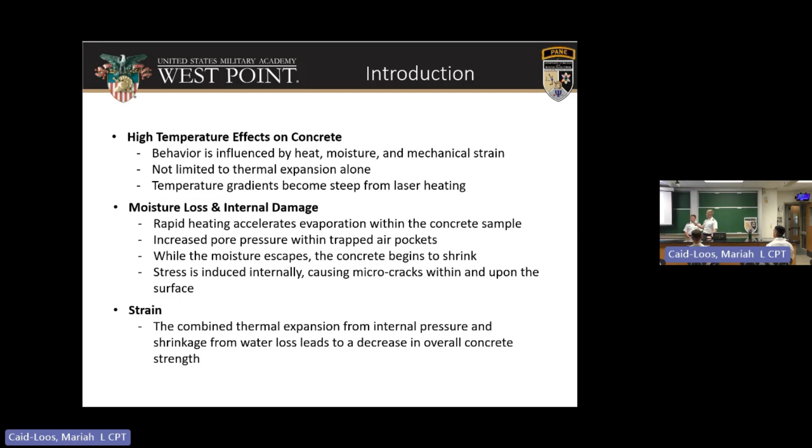So a lot of the theory that we went into is kind of revolving around multiple articles from places like Oak Ridge primarily that go deep into uniform heating of concrete and what it results with loss of compressive strength. So as I mentioned earlier, there's a couple of spots. It depends on temperature, pore pressure, and strain. And the total concrete strain is just a difference between the free thermal strain and load-induced thermal strain.

In the future, we'll focus on more load-induced thermal strains, but we wanted to see first initially just results of our concrete degrading. So all of our samples that we've currently undergone have been unstressed concrete, meaning that we'll get more noticeable results as there's no load that is pushing those aggregates back within the internal structure of the concrete.

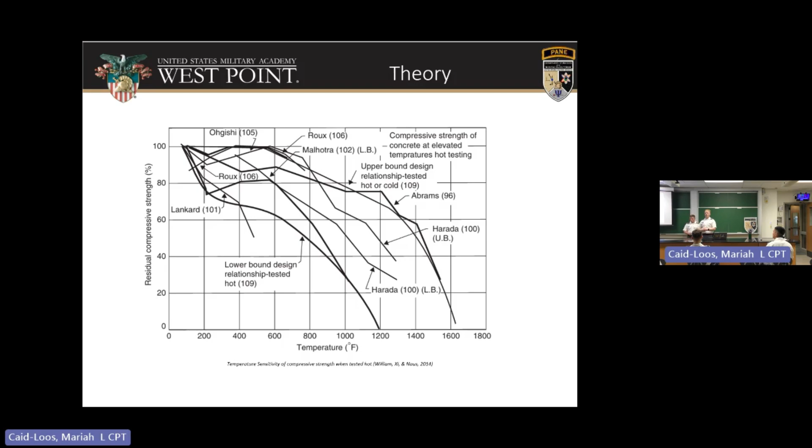This final one I thought was really useful. It shows multiple different average reviews and testing that use multiple different types of concrete ratios. And you can see a trend line downwards as the temperature increases of the residual compressive strength.

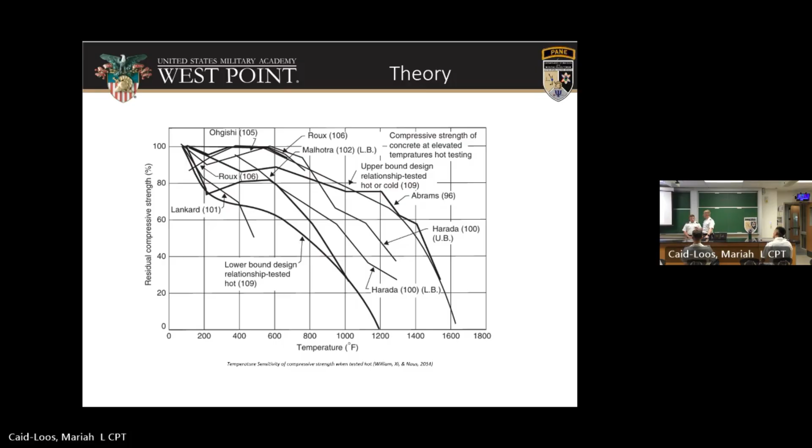So I'll get into some of our experimental processes now with Aaron.

All right, so first off, let's talk about the laser that is actually used. We have a 1.5 kilowatt laser that is an IR wavelength spectrum at 1070 nanometers. It has a 2 centimeter spot size, and it has a Gaussian beam profile. We are about 8 meters away from our targets in the lab, and it has gone up to around 25 meters out on the range.

What we did is we hit one point right in the middle of our circle, and it would hit it for either 10 minutes, 25 minutes, or an hour, all at 500 degrees Celsius. And then we also did one test at 600 degrees Celsius to see if there was a big difference. Then the actual compressive strength, we did a punch test. As you can see here, we got a little metal punch that was put right in the middle of the cylinder, and then the compressive strength was tested.

For this year, we got a little bigger cylinders, which is great because it's more realistic, obviously. When we're actually using this system in the future, we will be getting much bigger samples. So this year, we only did hour-long engagements. So we started with a 10-minute heating up period. They got us up to 500 degrees Celsius.

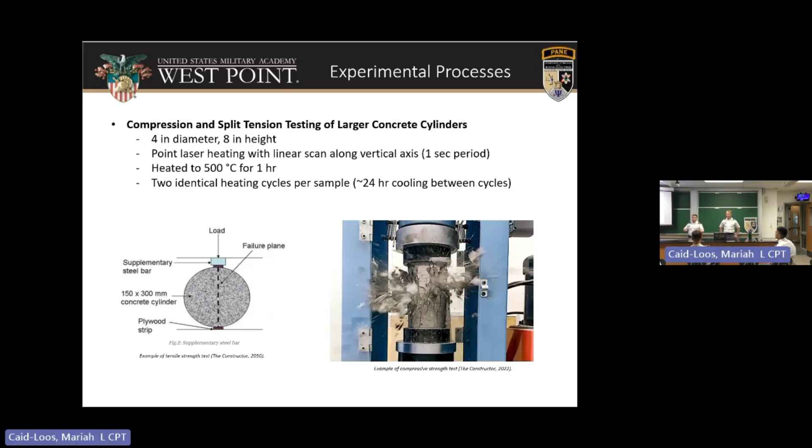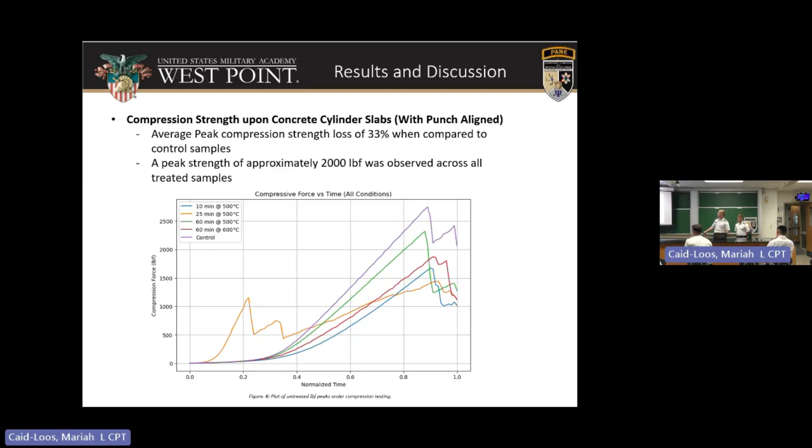When we initially got to it, we found the average treated compression peak for pounds of force was about 2,119 pounds for the treated samples, versus about 3,097 pounds of force for our control. Here are some results from our second test.

First, the compressive strength vertically with the larger concrete samples achieved an average peak compression strength loss of about 12.6%. What we found is that for compressive strength there is lower variability, and we believe that's because we achieved the intended purpose of removing enough moisture within the concrete to create a weak internal structure. There are enough air holes inside these concrete cylinders that when we crush them, it basically cascades the inside and pushes enough aggregate outward for the concrete to crush faster.

The split tension test didn't give us the results we quite wanted. We saw the average peak compression strength was only lost by about 3.6% from the control sample. We believe this is most likely because concrete is already not very resistant to split tension, and because of that, if there was any basic creep that existed beforehand, before we lased any of these samples, that would be enough to cascade and create the actual crack that's supposed to form.